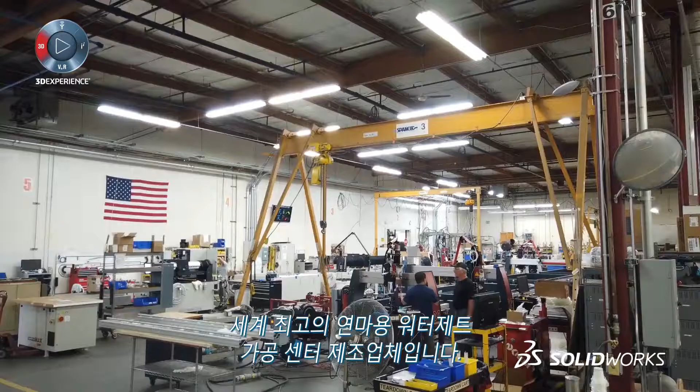OMAX is arguably the world's leading manufacturer of abrasive water jet machining centers. The mission of OMAX is to have a water jet machine in every shop, and to do that we need to keep advancing the technology.

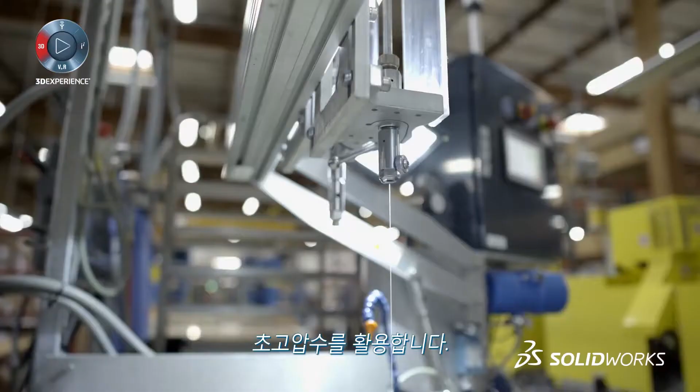Essentially, abrasive water jet machining utilizes ultra-high pressure water to cut through just about any material you can think of. We have a pretty diverse customer base, ranging from mom and pop machine shops to Fortune 500 companies.

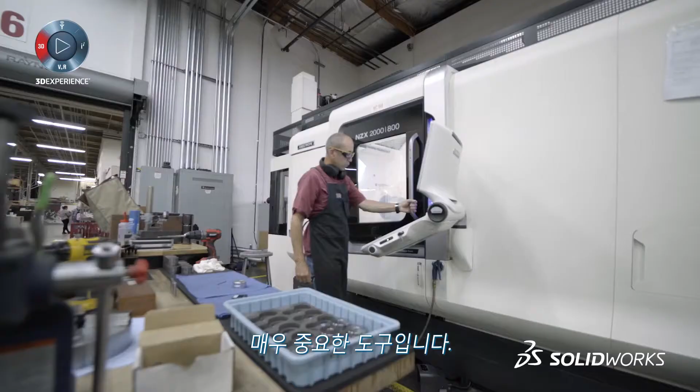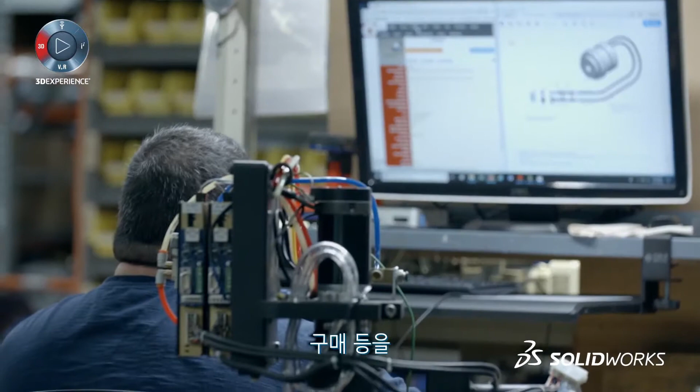SolidWorks is a pretty integral tool to our day-to-day operation. With all of our development of product and tooling, it allows everything to be stored, tracked, and managed automatically. If you need access to data and you're in engineering, manufacturing, marketing, or purchasing, you need to be able to access these models to do your job. SolidWorks PDM Professional makes that possible for us here at OMAX.

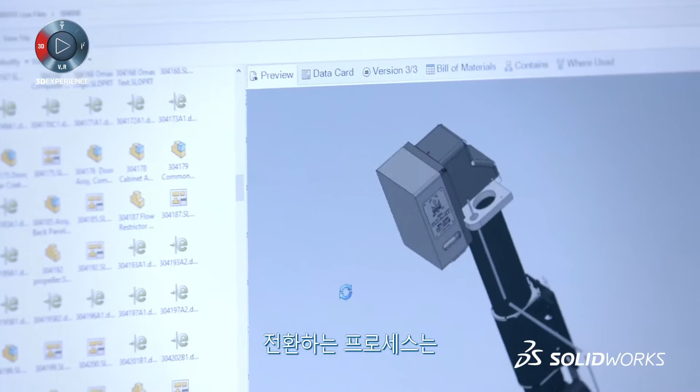When I first came here, we had no document vault at all, no real file or version control. It was more difficult to see the history of the product design flowing through our system. We made the conversion to PDM, and thank God. To transition our data from the old vault into the new vault, and that whole process was pretty smooth and pretty seamless. SolidWorks PDM has just been a game changer.

Every new part we create is going to have that part number and description baked into the metadata, along with a number of other features that are handy. Being able to put in a part number and unerringly snap to it and find it, that's really key for us. We're going to live and die by the old models that we can find.

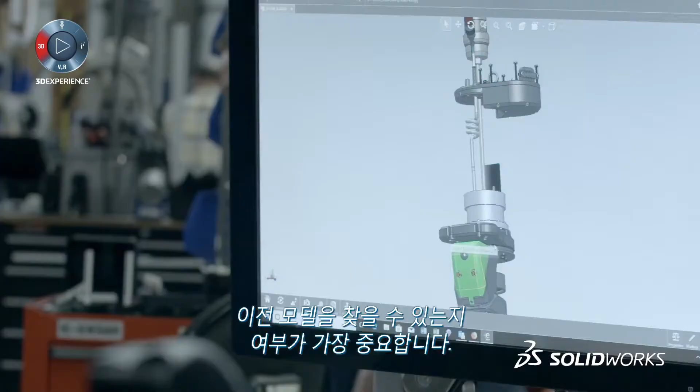And we could integrate that CAD right into our tooling and our test equipment. The traceability of it is so useful, and I can't imagine trying to go without it anymore. There's a purpose for everything, and it makes our CAD data, and thus the rest of the engineering processes, flow ever so smoothly.

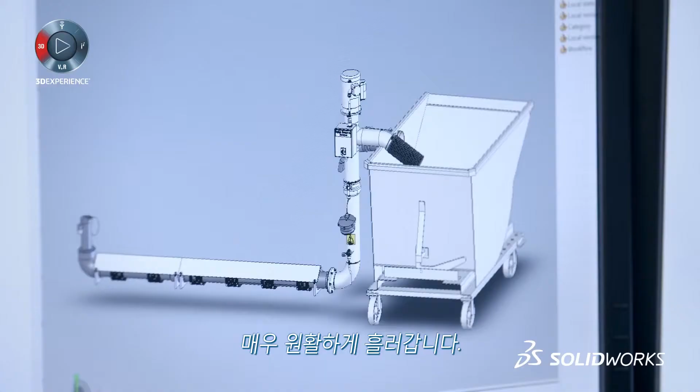SolidWorks PDM Professional has really allowed us to up our collaboration game. The concurrent sharing of files, whether released or old and archived, has really solid stability.

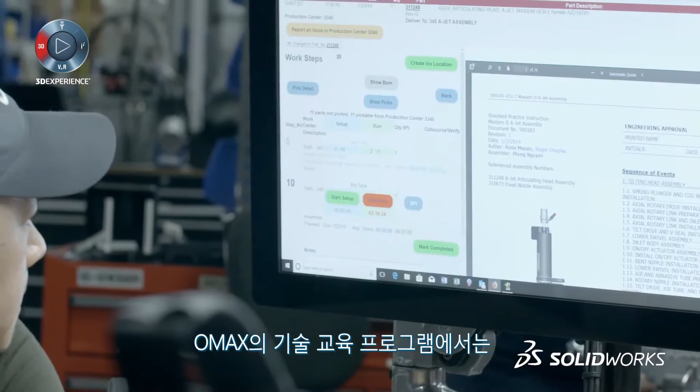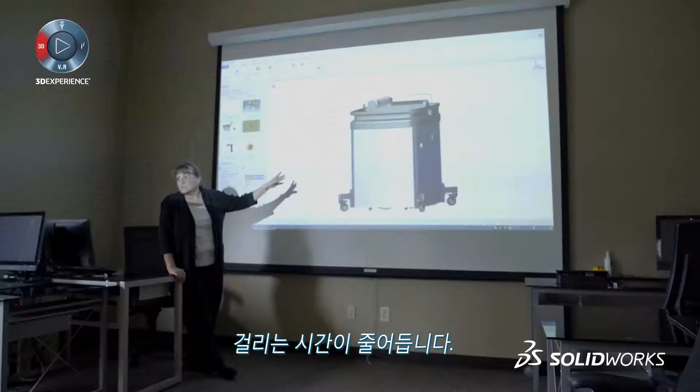In the technical training program here at OMAX, we also work with technical writing and customer-facing documentation. We use the SolidWorks models developed by our engineering department to help compose the technical content and drawings for our documents. We have the most current model available when we need it, and less time interacting with the engineer trying to find that information. So PDM is our source repository for all of the models that we need as tech writers.

We have customers that look at our documentation and say, I've worked with machine tools all over the world, and you guys have the best documentation that we've seen in the machine tool industry. PDM is a breath of fresh air.

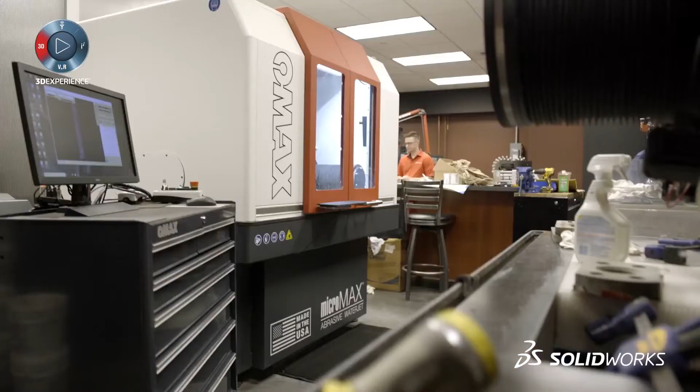We expect to continue to use SolidWorks to help us advance our technology.